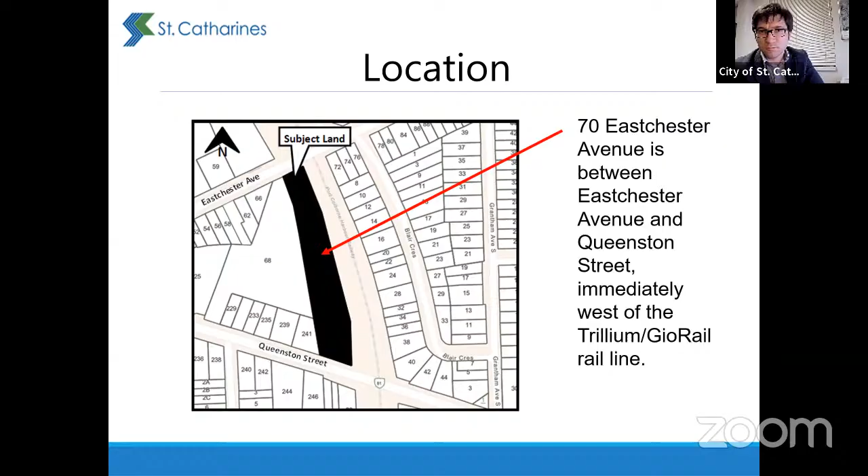The process for the application is that we received the zoning bylaw amendment application on December 21st, 2022, and the application was deemed complete on December 31st, 2022. Under the Planning Act, the city must accept and process complete applications. So by the city having this open house and starting this process, it's not implying that we support or will necessarily be approving this application.

We are following provincial statutes by having a formal planning process. Public participation is part of that process, which is why we're having the open house tonight, to inform the public. There will be opportunities to submit questions or additional feedback going forward. The application has been circulated to city departments and applicable external agencies, for example the Niagara Region, as they have jurisdiction over Queenston Street, or GioRail, because they own the land and operate the rail line immediately to the east of the site.

Again, the application is not being considered for approval tonight. The ultimate decision on approval will be made by city council at a future council meeting. Formal notice of that public meeting will be sent out, usually aiming for around 30 days prior to the actual meeting taking place, and will be posted on signs on the property and on the city's website, much like how notice for this public open house was sent out.

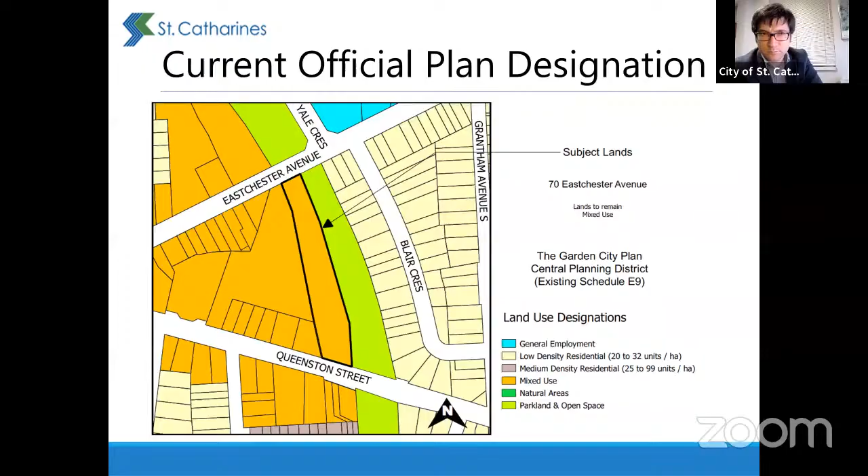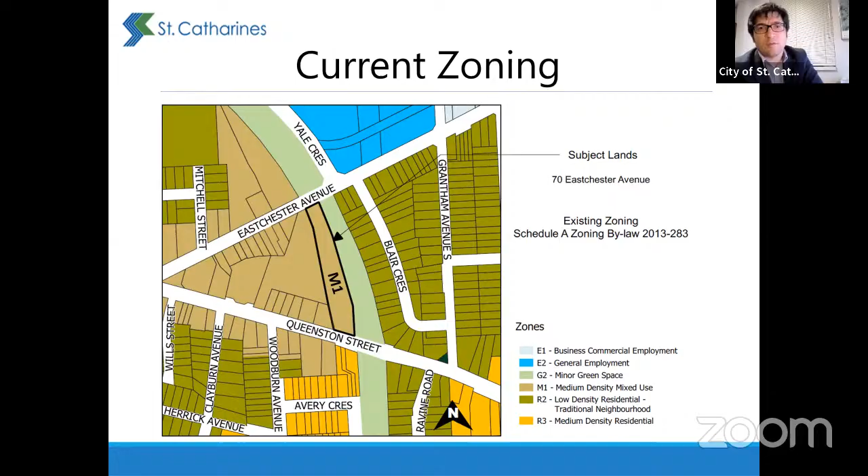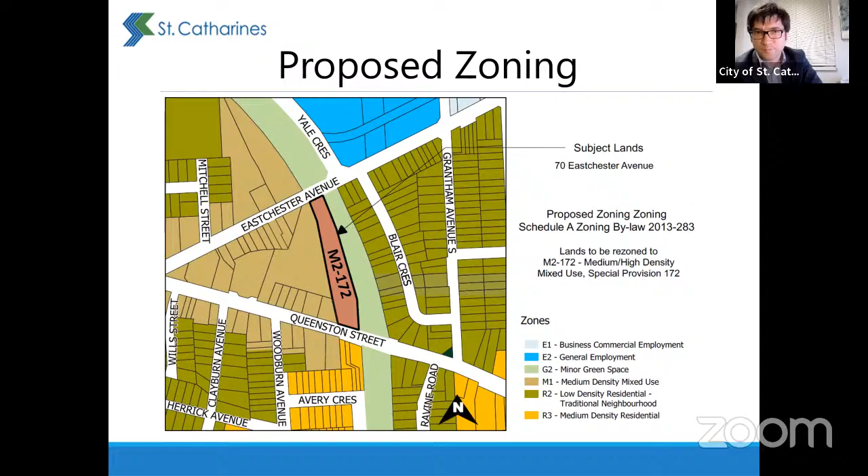Those are for the properties that front onto Blair and moving towards Grantham Avenue, and a little further to the south is land zoned medium-density residential, in the Avery Crescent area. Once again, the proposed zoning is M2-172. The applicant has, so 172 is the special provision, which would look at some of the zoning deficiencies that need to be addressed for the proposal to be built. The proposed zoning changes on the site are moving from M1 to M2, and also seeking some changes to what is permitted in the M2 zone.

Maximum lot area: the request is to increase from what is permitted in the M1 and M2 zones, being 4,000 square meters, to 4,680 square meters, in recognition of the fact that the site is existing and slightly oversized compared to what is permitted.

The maximum front yard, and we consider the Eastchester lot line to be the front lot line for the site. The maximum front yard currently permitted in the M1 zone is 24 meters. With the location of the building on the site, the request is to increase it to 46.45 meters.

The maximum interior side yard, that's the yard on either side of the building, to the east there is no maximum interior side yard - there's a minimum of 1.2 meters. The applicants have requested to impose a maximum of 15 meters, in recognition of the required setback from the railway property being 15 meters.

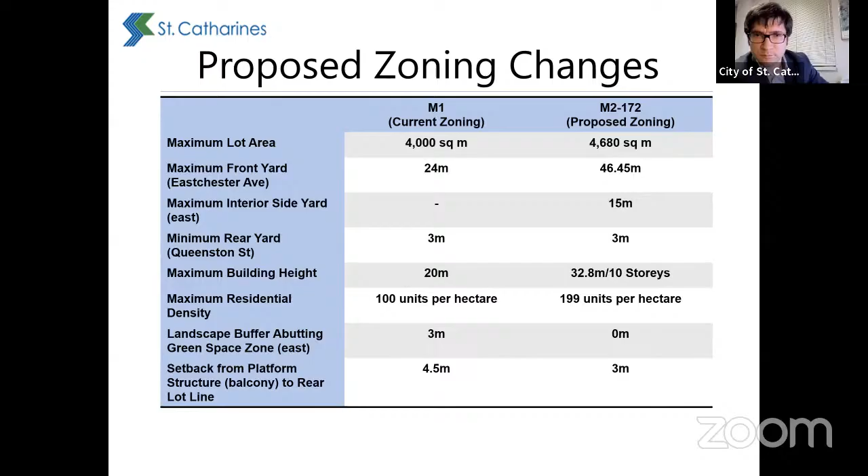I did receive a comment from a member of the public. The setback on the western lot line is 1.2 meters. That is meeting the required side yard setback both in the M1 and the M2 zone, so there is no reduction to the interior side yard setback to the west as part of this application.

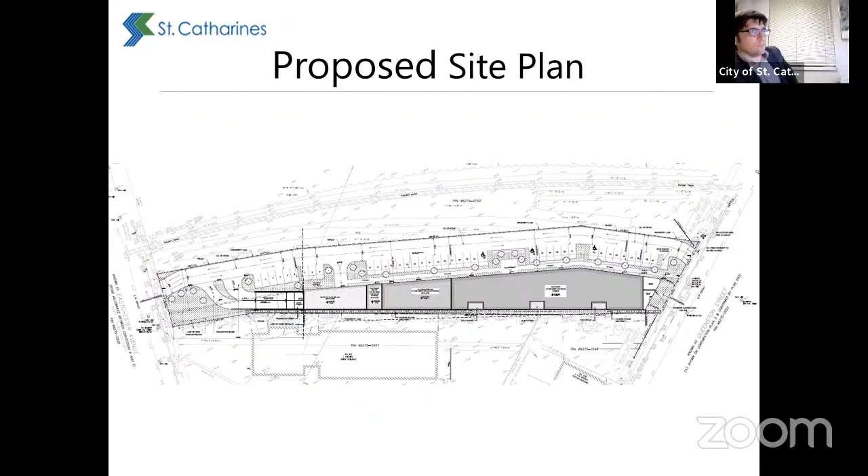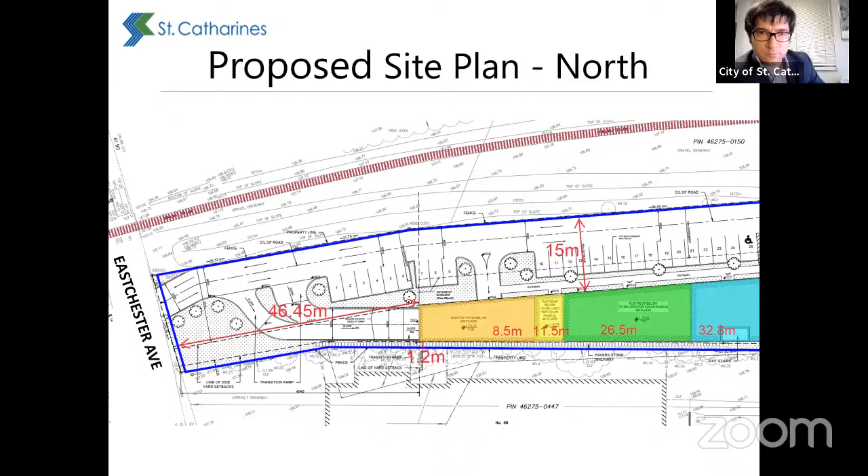One additional item to note is that the region is requiring 2 meters of land to be dedicated to the region gratuitously, free of charge, and that land will be incorporated into the Queenston Street right-of-way. Some of the drawings make note of a road widening, but the road is not actually proposed to be widened as part of this application. That's just the technical language for what's happening; it's land being added to the road allowance. So the setback of 3 meters is actually to the new lot line that will exist after the dedication is taken. The setback from the current lot line along Queenston Street is actually going to be 5 meters.

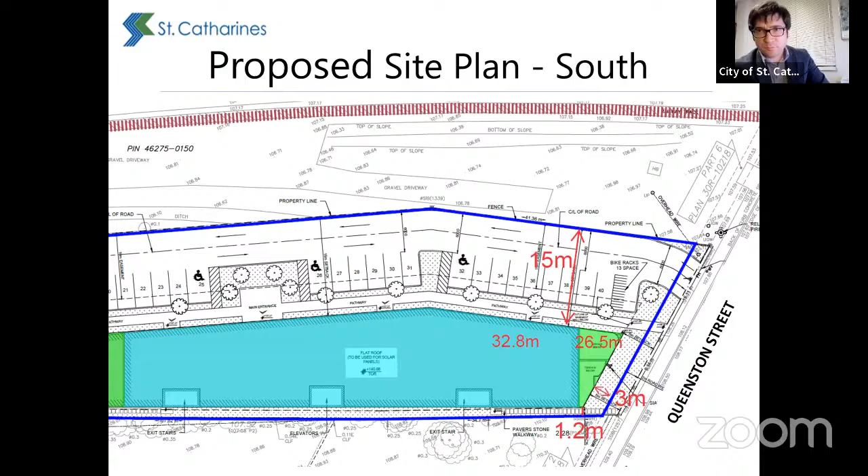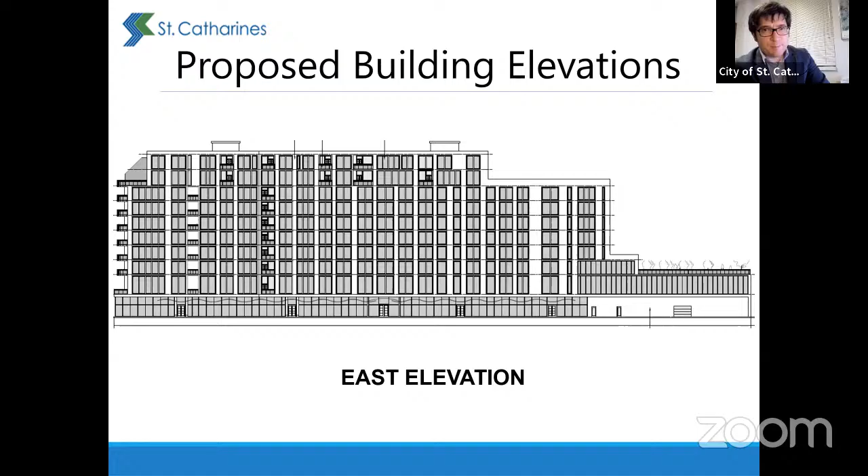Then the western elevation of the building, the opposite side, has significantly less windows compared to the east side. That's due to accommodating elevators and staircases.

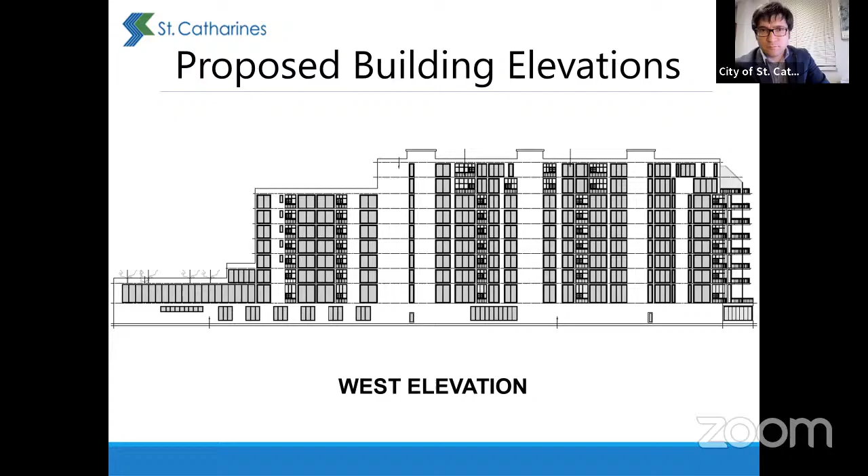So some common questions I've received so far this evening, or in the lead up to this evening. I received a lot of questions and concerns about traffic. Neither the city nor Niagara Region required a transportation impact study to be submitted with this application. The city's transportation staff determined that due to the scope of the proposal, no road improvements would be required to access this specific site.

Eastchester Avenue is under the city's jurisdiction; Queenston Street is under the region's jurisdiction. I cannot speak for why the region did not require a transportation impact study for Queenston Street. However, I imagine the response would be similar to the city's: that the scope and scale of the development would not warrant improvements to Queenston Street in terms of signalization or turn lanes into this development.

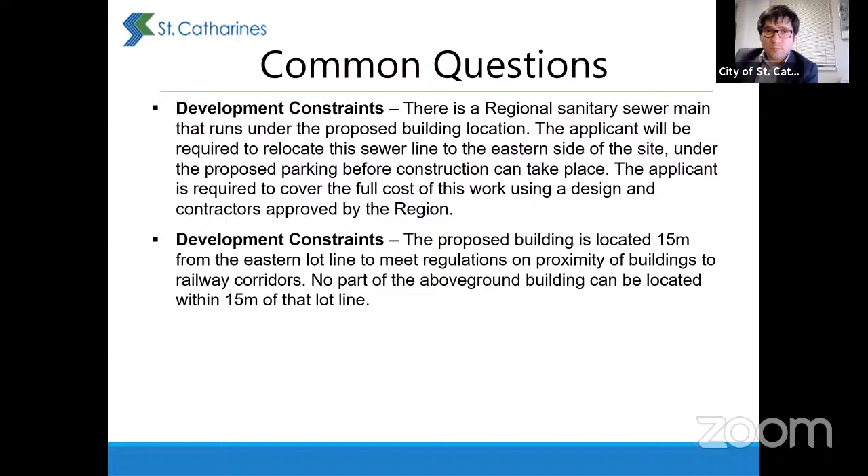That concludes an overview of the development. All application materials were shared on the city's website, www.stcatharines.ca/development. For those that do not have internet access or cannot access the material, it can be viewed in hard copy at City Hall. Any additional material submitted will be uploaded to this website.

Next steps. Please submit questions, comments, or concerns to staff for consideration and review of this application and formulation of staff's recommendation to council. A staff report will be prepared and made publicly available prior to the meeting and decision of City Council. A public meeting in front of City Council will be held at a future date. Notice of the public meeting will be mailed out to surrounding properties with a sign posted on site.

The format of that meeting—we are still doing online meetings, but some accommodation can be made for folks that wish to attend and speak directly to council. If you wish to be notified of this meeting, you can get in touch using the contact information on the next slide. If you received a notice in the mail, you will receive the next notice in the mail as well. But certainly if you contact me, I will let you know, and if I have your email address, I will also email out a notice prior to that meeting.